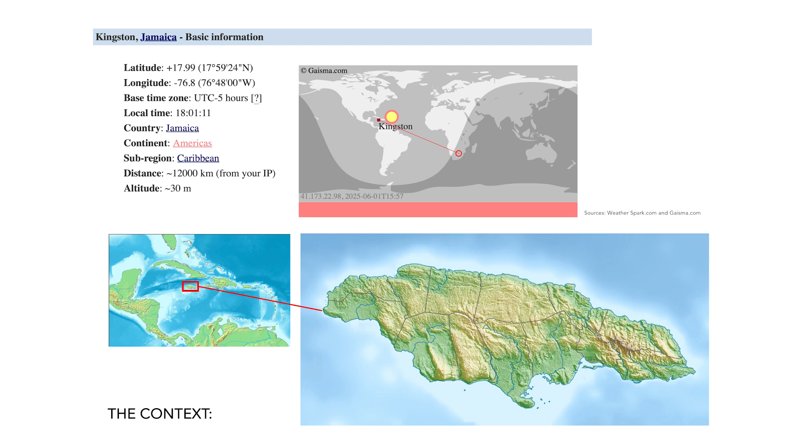I'm from Jamaica, a small tropical island in the Caribbean Sea, approximately 12,000 kilometers northwest of Johannesburg, around halfway between North and South America, and just east of Mexico. It's the 3rd largest island in the Antilles, Cuba and Hispaniola being the other two. Jamaica has a little less than 3 million people, which I gather is around half the population of the city alone. The island is mountainous, with a central ridge going up to around 2,256 meters above sea level, with the Blue Mountains in the eastern end.

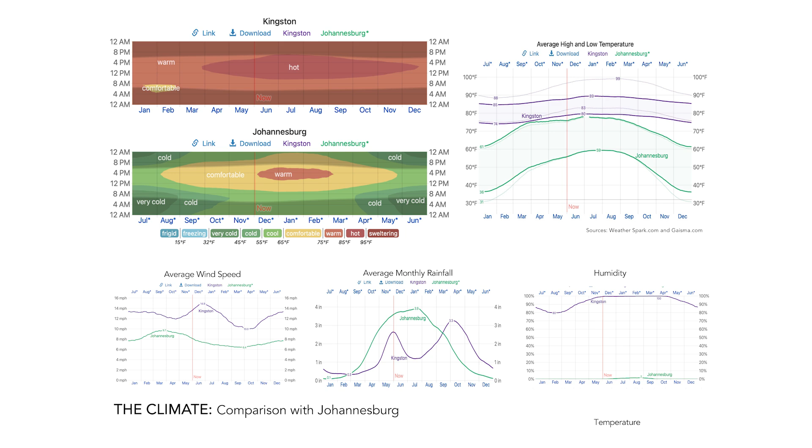The weather is generally hot, averaging between 26 and a low of 21 in the cooler months, which are November to March, and 33 degrees in the summer. So when you compare Jamaica with Johannesburg, our coolest time of year is equivalent to your hottest time of year. That's right. And that's why I'm so cold today.

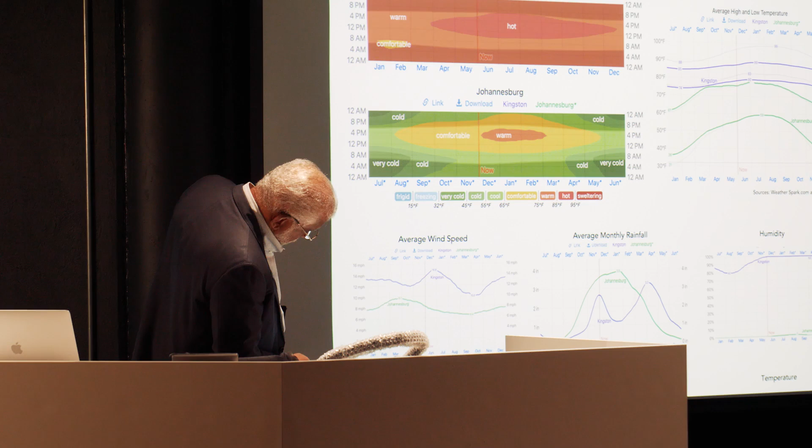Another sharp climatic contrast is the humidity, shown in this bottom right diagram, which ranges from 80 to 100% in Jamaica compared to nearly 0 in Johannesburg. The island is also susceptible to hurricanes, usually between June and November.

And also to earthquakes, the most famous being in 1692, which destroyed Port Royal, which was then called the wickedest city in the world, with pirates, plundering, and prostitutes. And in 1907, which destroyed Kingston, the capital.

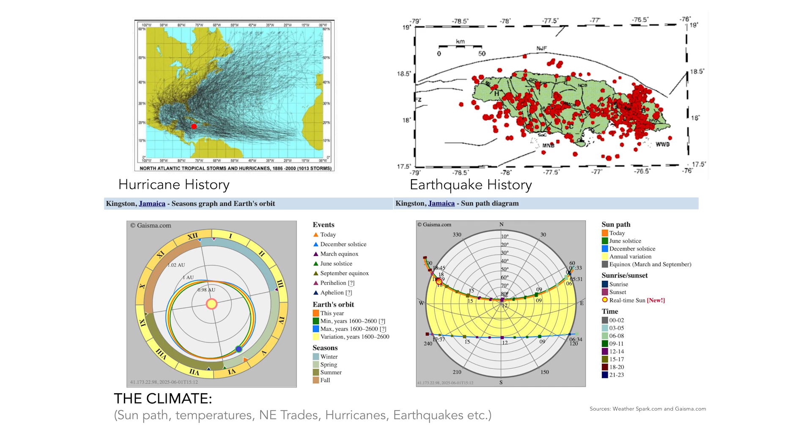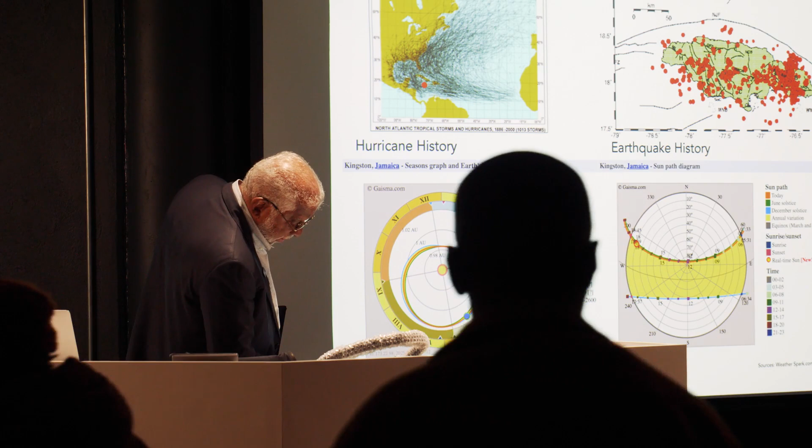While our motto is 'out of many, one people,' the vast majority of the population is of African descent, with 15% Afro-European, 3.5% Indian and Indo-African, 3% Caucasian, 1.2% Chinese, and other mixtures. Wow.

Jamaica, like many other Caribbean islands, suffered under slavery for almost 350 years, but never gave up the fight, with runaway slaves like the Maroons defeating the English.

One may ask, what is Jamaica's culture known for? One could argue rum, reggae, Bob Marley, and dancehall, Vybz Kartel. Its cuisine: ackee and saltfish, jerk pork, curry goat, and patty. Its cricket, Chris Gayle, and its track, Usain Bolt.

So it is in this context, climate, and culture that I grew up and still live. I was fortunate to have middle-class parents: my father, a civil servant who worked in Trinidad for the evolving West Indian Federation in the early 50s, and later as a statistician in independent Jamaica; and my mother, a World War II veteran ATS radar operator, who later became the first woman to sit on the bench in Jamaica.

The newspapers at the time reported that people would visit the Sutton Street Court in downtown Kingston just to see this novelty.

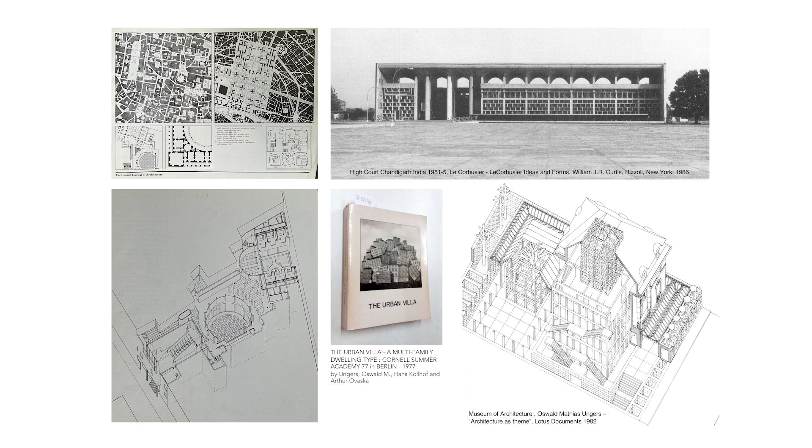Both these men, indirectly and directly, influenced my time at Cornell. Rowe with a humanist reinterpretation of the modern movement, with Le Corbusier as the major translator, while rejecting Corbusier's urban planning for the contextual idea of urban bricolage, exemplified in his book Collage City, and Ungers from the summer school in Berlin in 1977 that I attended, which produced the book The Urban Villa, Multifamily Dwelling Type, with his typologies, architecture as theme, and grids.

He assembled very famous architects at the time to come to Berlin. This was before the wall had fallen, for 3 lectures every week for 2 months, 1 American, 1 German, and 1 European. People like Kenneth Frampton, Bob Stern, Raimund Abraham, Richard Meier, Charles Moore, Peter Eisenman, Philip Johnson,

Rem Koolhaas, Aldo Rossi, Vittorio Gregotti, Alison and Peter Smithson, Hans Hollein, Robert Krier, Carlo Aymonino, Massimo Scolari, James Stirling, and Berliners, Jürgen Sawade, Georg Heinrichs, Josef Kleihues, Werner Düttmann, Rolf and Jan Rave, Volker Thyssen, and Johannes Uhl, who had an impression on me because he based his entire architecture on Charlie Parker's music.

The lecture series was open to the public and served as a platform for the exchange of ideas between students, architects, and different countries and the Berlin public.

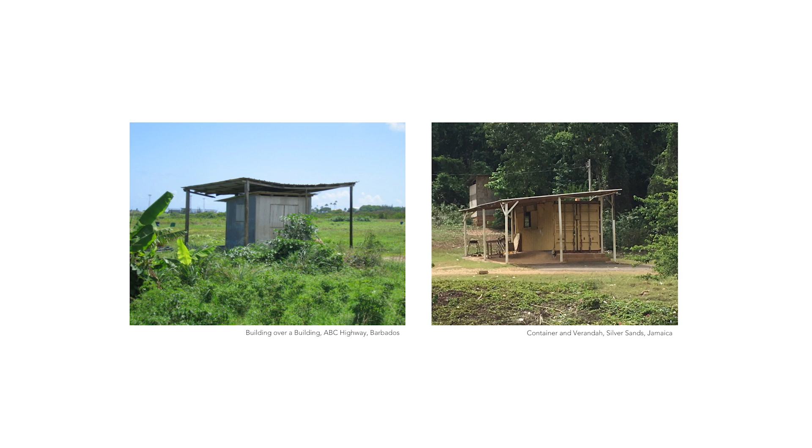So, the first residence designed over 40 years ago in Barbados. It was the first home for a young professional couple with a tight budget who wanted to break with tradition and engage an architect to maximize the 1,800 square feet that they could afford, in order to give the appearance of a much larger and more spacious house.

Nicknamed the Umbrella House, the design parti was to separate the roof and its supporting columns from the rest of the building and construct these elements in the early months of the year when it was dry, so the roof canopy could provide shelter and shade from the elements to ensure that work to the other areas could proceed uninterrupted during the rainy season.

Functionally, the house is divided into 3 simple hip-roofed pods, or umbrellas, creating a private bedroom zone, a private living dining room zone, and a carport storage vehicular zone added later.

The central entry and foyer acted as a divider space to separate the public zone from the private zone and to provide the initial view of the central garden with surrounding landscape, incorporating both inside and immediately outside the house.

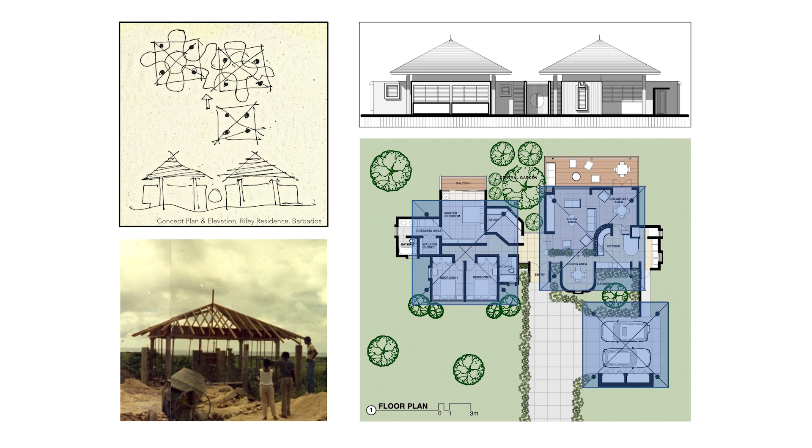The 3 sets of 4 circular columns support each of the 3 pyramids that are closed by a pine ceiling that conceals the main beams.

The enclosure walls are separated from this umbrella by a high-level ribbon window, forming a layer of transparency. These walls, sometimes curved, sometimes rectilinear, and sometimes chamfered, dart inside and outside and in between the columns. This separation between wall and roof virtually extends the boundaries of the house and brings in a lot of natural light, adding to the calm, floating feeling as clouds move slowly by.

The glazed mahogany front doors and curved natural coral stone were all built locally, while due to cost constraints, the other materials purchased were the least cost available off-the-shelf items based on standard sizes. A number of rooms were added a few years ago, but these additions have not affected the initial concept, and the front facade remains as pure and simple as it was three decades ago.

The next residence is a small single-story house for a unique pioneering individual who wasn't afraid to be the first to construct a building described as a strong yet sympathetic statement on a small site of a hillside cliff, long before electricity had reached the area.

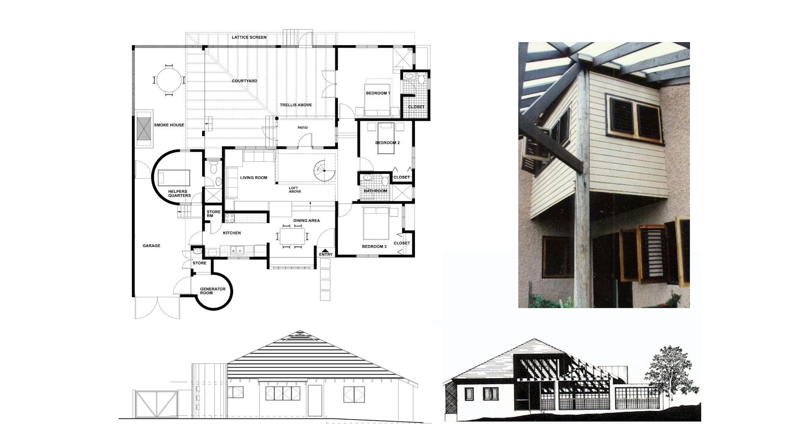The third house I'm going to show is what I say: interesting clients make interesting buildings. I recently had the pleasure of working with two sisters, Carolyn and Donette Cooper, longtime family friends.

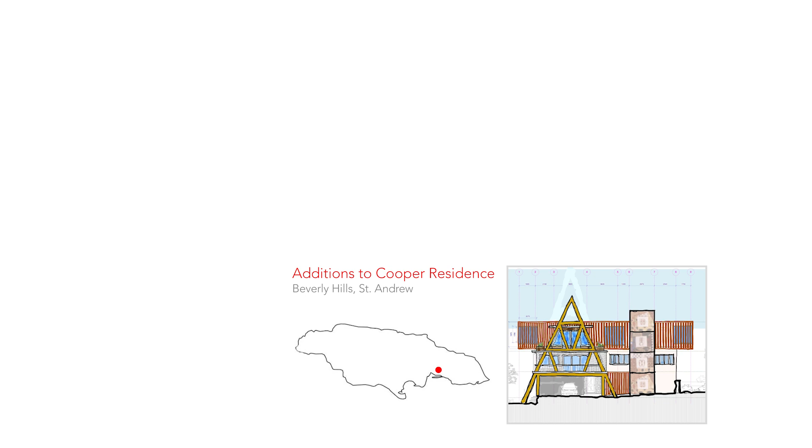Carolyn is a former professor of literary and cultural studies at the University of the West Indies and the author of brash but important literary works such as Noises in the Blood: Orality, Gender, and the Vulgar Body of Jamaican Popular Culture; Bob Marley: The Man and His Music; and Sound Clash: Jamaican Dancehall Culture.

Donette is a Washington, D.C.-based attorney at law, a textile and fiber artist, and quilter who has exhibited extensively over the last 25 years with permanent works in the National Museum of African American History. Her work is influenced by African textiles and the individual cultural and spiritual messages that they encode.

The brief, in a nutshell, was to modify Carolyn's existing two-story house and create a two-bedroom addition with a quilt studio for Donette, as she planned to return to Jamaica after retirement. Both sisters are Afrocentric, proud of their heritage and culture, and make no reservations in challenging colonial norms, even in the staid, upper-class Beverly Hills community on Long Mountain, where the residence is located.

Three site locations were looked at, either side of the existing house and on top of it. The site slopes from north-east to south-west, with upper-level views overlooking the city of Kingston. The existing 1950s concrete house is oriented to the southeast to capture the onshore breezes, while internally the living room and veranda have views of New Kingston.

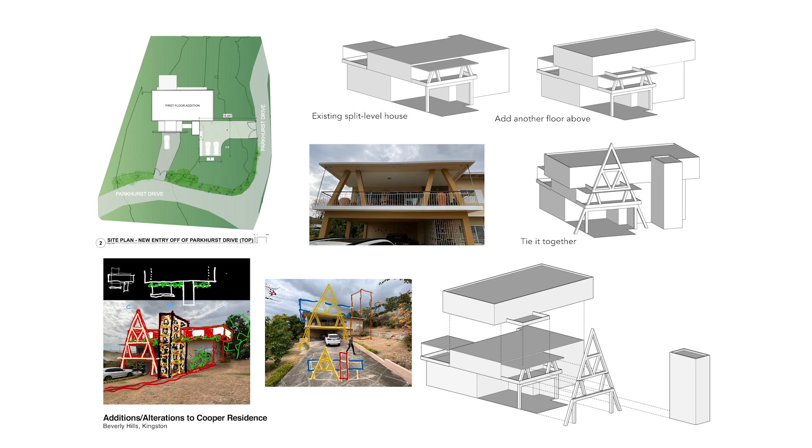The architectural concept was based on adding a third floor with openings at the corners to capture the views and breezes, while the structural concept was derived from the existing triangular columns.

These were extended to create an A-frame to support the upper floor and provide a strong vertical facade for the entry to the existing house. Together with a second vertical element and entry stairs to the flat, they tie the three-story composition together.

The upper floor is divided into two: the public living/studio zone and the private sleeping and service zone. All major spaces—living, studio, and bedrooms—are located on the corners to provide cross-ventilation and capture the views of the city to the southwest and the Blue Mountains to the northeast.

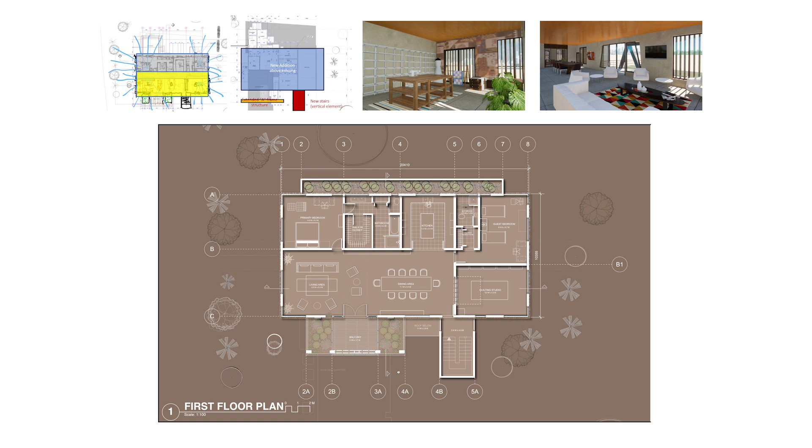Vertical wood slats wrap around the entire box, acting as sunshades during sunny and windy periods and as shutters during hurricanes. The overall composition reflects the spirit and unabashed cultural outlook of the clients and seamlessly integrates modern tropical elements while providing two separate dwelling places in one location.

The next project is the Basic Medical Sciences building, now the Faculty of Medical Sciences at the University of the West Indies, Mona campus. To quote from the National Renewable Energy Laboratory's 'Laboratories for the 21st Century': as a building type, the laboratory demands our attention. What the cathedral was in the 14th century, the train station was in the 19th century, and the office building was in the 20th century, the laboratory is to the 21st century.

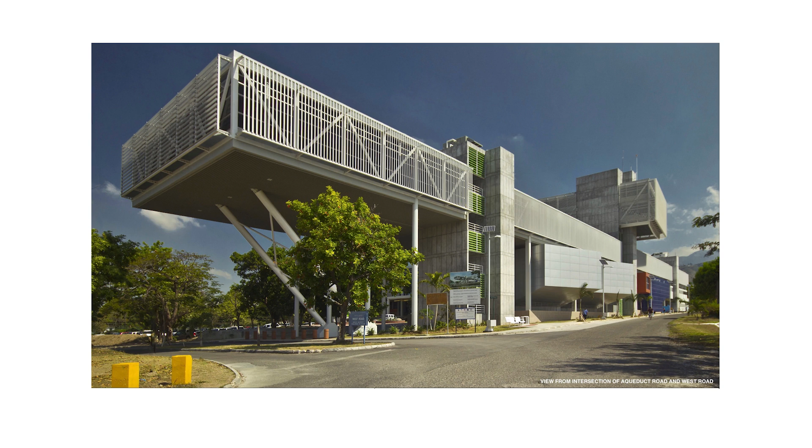That is, it is the building type that embodies in both program and technology the spirit and culture of our age and attracts some of the greatest intellectual and economic resources of our society.

As buildings are responsible for 40% of the world's total primary energy consumption, the architect, engineering consultants, and university felt that this complex should play a role in leading the way to making it more of a green building.

The building has a number of features that conform to good environmental practices and energy efficiency, such as using chilled beam air conditioning—the first time it was used in Jamaica—that utilized cooling from the nearby cogeneration plant, direct digital control, energy and building management system, solar lighting and heating and partial power, green roofs that replace the landscaped area taken up by the building, rainwater harvesting, grey water flushing, green fume hoods (another first in Jamaica), on-site water storage and disposal, grasscrete parking pavers, among other features, while making practical use of passive design strategies such as natural light, natural cooling concepts such as cross-ventilation, and also responding to site-specific conditions and natural environs.

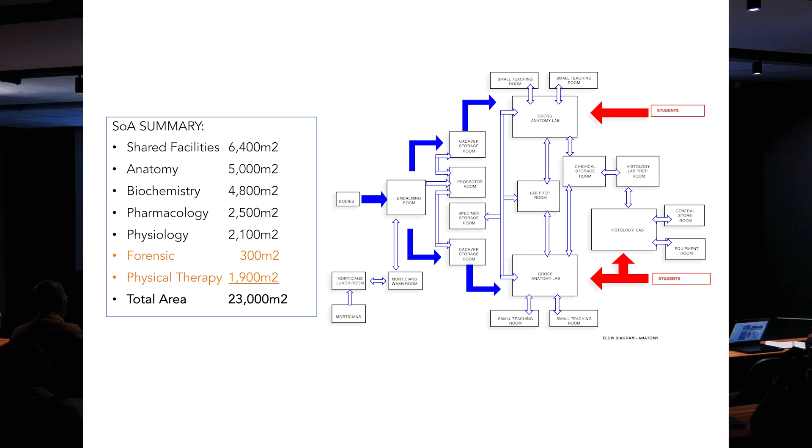Today, however, I don't want to dwell on this, but rather focus on the low-tech passive design factors relevant to the topic, namely the client, the context, the climate, and the culture, and the symbiotic relationship between them and the resultant architecture.

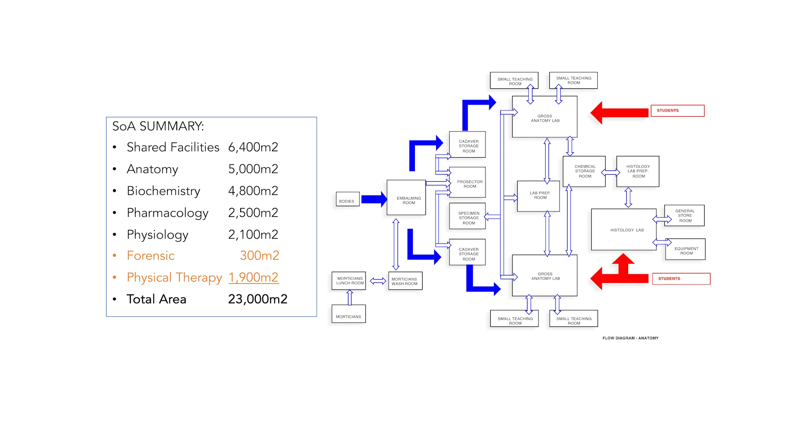The university capped the building height at 6 stories, which translated into 80% coverage of a relatively small site. The original brief was for a new state-of-the-art facility to meet accreditation requirements, with specialized programs developed by various department heads.

At first, each head of department wanted his or her own building. But after several meetings, detailed accommodation schedules, and discussions, the stakeholders agreed to do this vertically.

Two climatic factors influence the design most: sun, the light and heat, and wind, the cooling breezes and hurricanes. Maximizing the abundance of natural light and the reduction in the amount of artificial light was a major factor in

the extensive use of glazed areas to the offices, research areas, and laboratories. Our tropical climate, specifically the site's coordinates, as well as functional necessities such as work surface heights and counters, determine the extent of glazing. To reduce the heat buildup on the external surfaces, sunscreens and other shading devices were necessary to ensure that most glazed areas were protected.

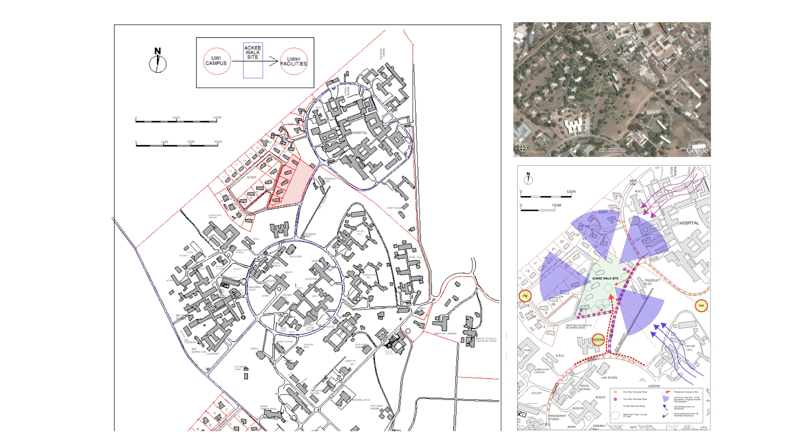These facilities include large lecture theaters, tutorial and seminar rooms, lounges and reading rooms, and network areas. The massing of the shared facilities on the eastern boundaries was distributed as pods with ventilation pockets between them to allow the easterly breezes to flow through the complex.

The sunscreens were engineered to protect the glass behind from flying debris, the main cause of damage during hurricanes, and the glazing to wide expanses were laminated.

The existing north-south link between the university campus to the medical campus emphasized the overall axis of the site and movement of students on foot. Countering this was a natural inclination to design an east-west oriented building to minimize the eastern and western exposures.

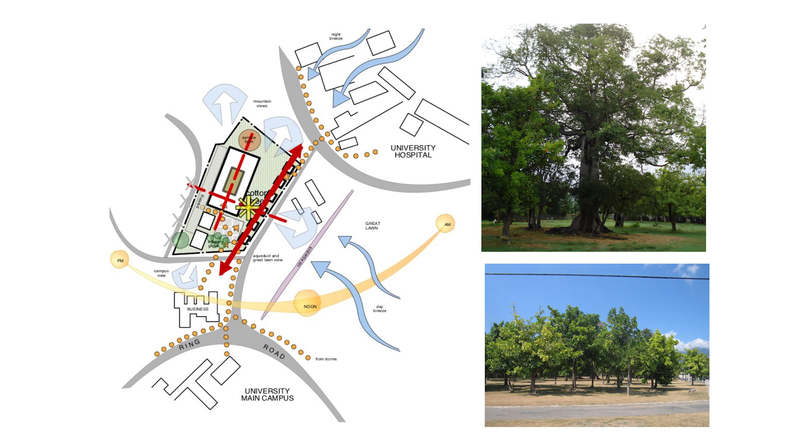However, the eastern view of the nearby old aqueduct, the Great Lawn and mountains is spectacular, with the morning sun rising quickly. The advantages, therefore, greatly outweighed the slight disadvantage that was overcome with protection by selective shading.

The lower section of the site was called Ackee Walk because of the Ackee trees in the south, where the cluster forms a rich canopy near to West Road.

Culturally, the planting of Ackee trees is associated with slave graves, and indeed a number of these remains, while not found on the immediate site, were discovered next door during excavation for the drainage pipe in the road just west of the site. The Ackee Grove is therefore a distinctive feature and good starting point to lead visitors into the

site. In the design, the existing node is reinforced by the creation of a fairly low semicircular amphitheater for small gatherings. It slopes from the west road towards the central areas of the site. The Ackee is also Jamaica's national dish and enshrined in our folk songs.

Another cultural element is the cotton tree. In Jamaica, the cotton tree is associated with ghosts, or what we call duppies. And as noted Jamaican cultural icon Olive Senior has noted, the tree is widely regarded as an object of both superstition and awe, and it is generally felt that a cotton tree should not be cut down, or else something bad will happen to you. Well, I didn't want anything to happen to us.

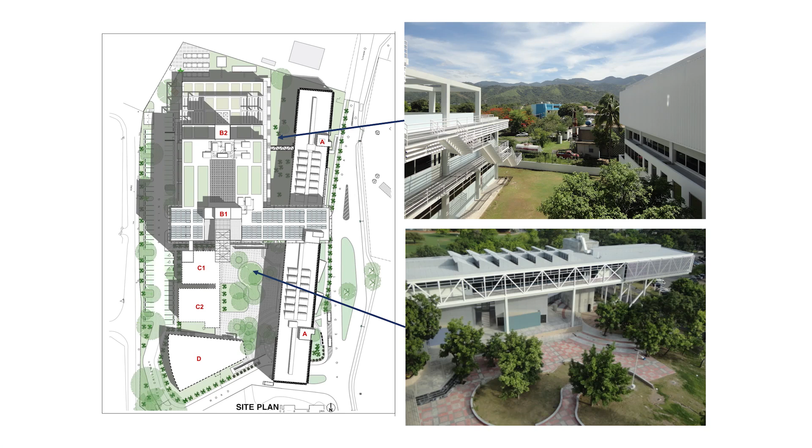Meeting the functional requirements, understanding the existing climatic and contextual influences, and a sympathetic approach to cultural norms led to a strong inside-outside relationship between the natural and the built environment, keeping the existing cotton and Ackee trees while creating functional and pleasant spaces for students and tutors to learn and relax.

The complex is roughly divided into four: a linear block, a central east-west block, and a northern section, and two southwest blocks to be constructed in phase 2. That would be C and D.

These blocks form two major open-to-sky spaces: a linear lawn to the north, and a central plaza to the south that leads from the Ackee Grove to the entrance.

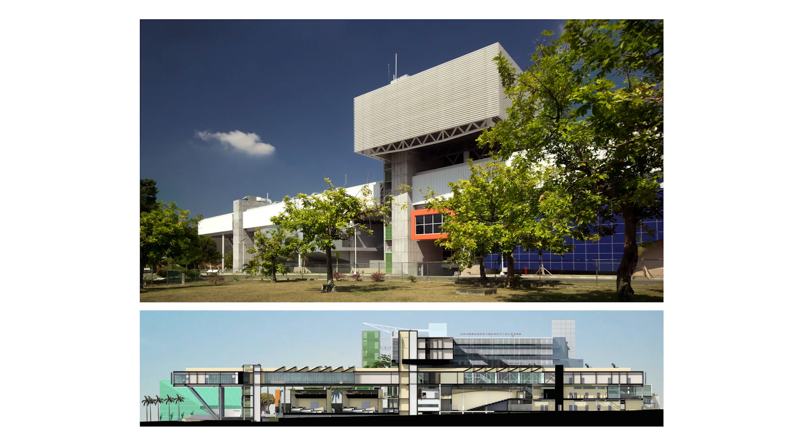Block A is extremely long, 160 meters, a three-story building consisting of 5 individual two-story object-type buildings housing shared facilities that are capped by a truss or protective canopy, with laboratories and research offices at the top level.

As the two main elevations of the canopy face east and west, all glazed areas are protected with vertical sunscreens that are more closely spaced on the western elevation.

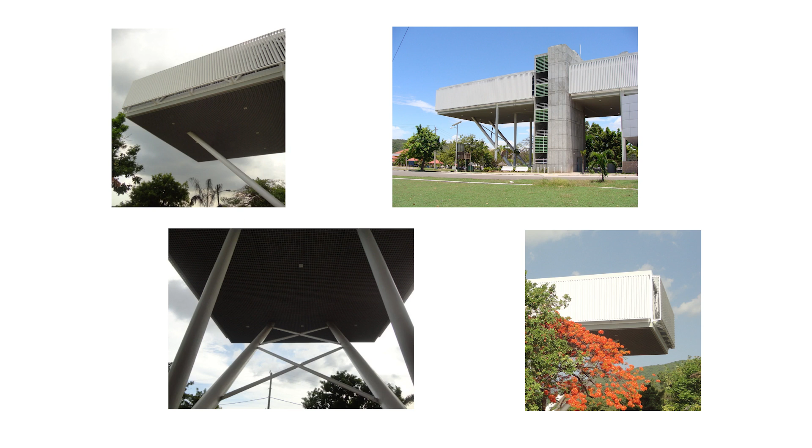The canopy is supported by columns at 8 meters with X-brace trusses, and it ends in the south with a dramatic cantilever over the main entry at the intersection of the west and aqueduct roads at the southern end of the site.

The main pedestrian entry is under the canopy and through the Ackee Grove up to the amphitheater steps and into the Agora, or central meeting plaza.

Block B ties the eastern and northern sections of the complex, with the cotton tree acting as a pivot or joint to Block A. This is it, and you can see the cotton tree.

The cotton tree at the central area where blocks A and B meet. The main pedestrian entries under the canopy and through the Ackee Grove.

Block B is the tallest section of the complex and is accessed both from the basement parking level as well as from the main entrance off of the plaza. Its form is ideal from a passive solar design standpoint, being fairly narrow and long with small surface areas facing east and west.

Inside Block B, there are 2 atria. One is a 6-story space that links the main labs, and the smaller one, a 3-story space. Both act as light wells and bring natural light to the lowest levels of the building through a space frame and skylights, and this area is not air conditioned.

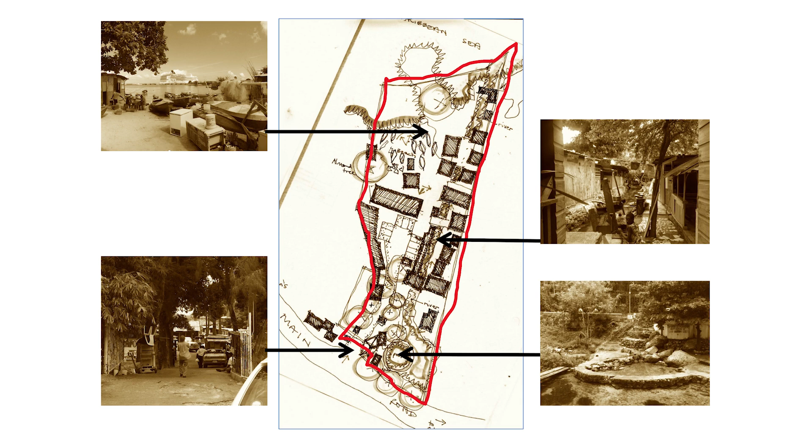The next project is in St. Ann, which is on the north coast of the island. And my first impression of the location, the site and the context was total chaos. The driveway was choked with cars and huts.

The Sailor's Hole was in bad shape and barely accessible, while the river was used as a service back-of-house area, washing and emptying trash, and the beach was overcrowded and hardly visible. The place had a reputation for drugs and harassment of visitors, if you could only actually get in.

However, with the problems, we saw potentials, and there were 4 elements that stood out: 1, the existing trees; 2, the pool or sailor's hole; 3, the river; and 4, the beach. And the uniqueness of the site, as well as the beautiful carvings in the trees.

So this shows the entrance and some of the carvings in the trees.

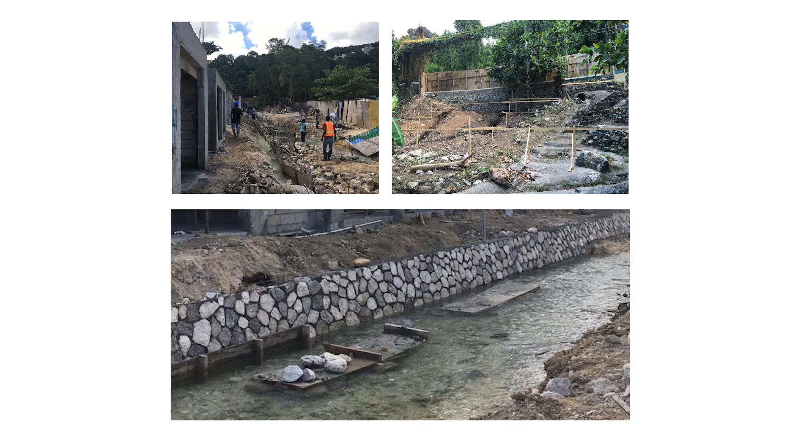And many of them were also engaged as subcontractors to the main contractor and worked on the excavation, the diversion of the river, and the cut stone wall, even adding their own flair and color of choice and spacing of the stones, which wasn't what we had designed originally.

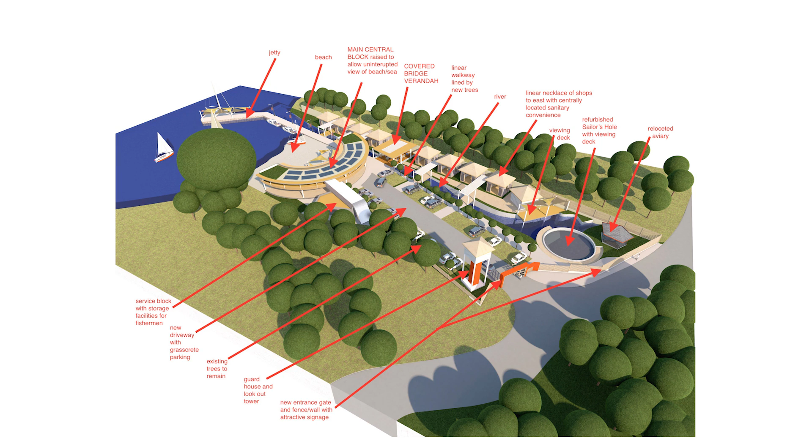The architectural concept emerged from a melting pot of the relevant brief, in a broader sense, the client, the climate, protection from the sun, wind, and rain, while capturing the northeast breezes, the context, in particular the axial grove of tall entry trees, the pool, the river, the beach, and the sea, and the culture, the fishermen's daily marine rituals, the colorful boats, and the art and craft of the work and music that was there.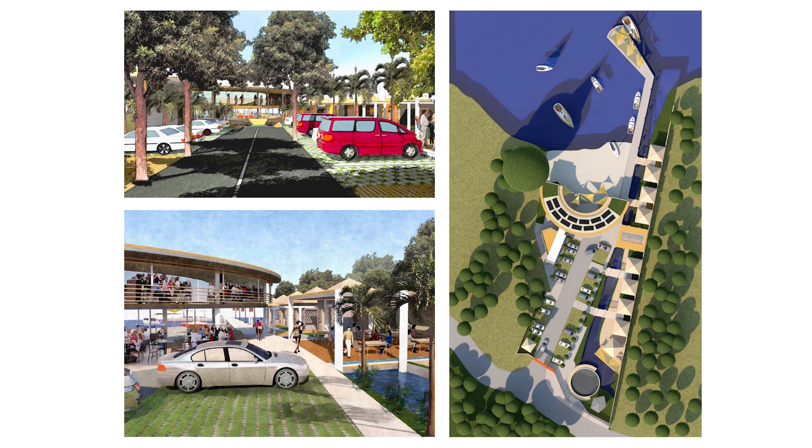So firstly, we created a wider, more accessible entry. We insisted that all the trees be kept, even although trimmed initially, even if we had to twist the road, which we had to do a little bit, or to lose 1 or 2 parking spaces, as they formed an axial grove on either side of the driveway.

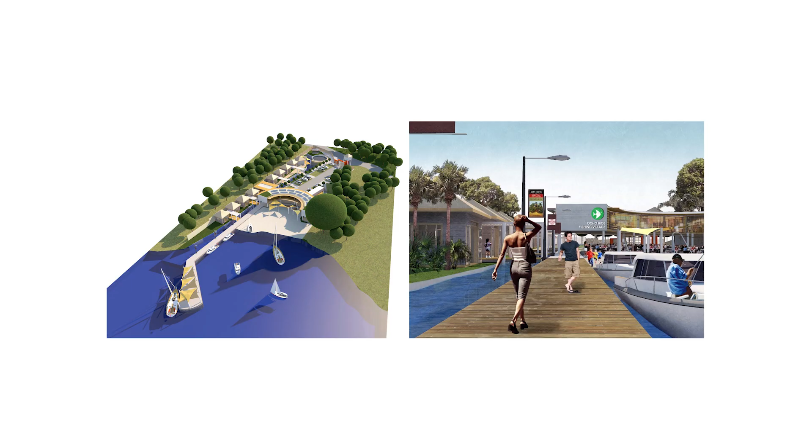Then we proposed a main central restaurant block to provide a constant visual connection between the entrance, the beach, and the sea. From where you arrived, we enlarged the pool and made some adjustments to the river to bring it to prominence in front rather than behind, so that all the shops opened onto a new deck east of the river. And finally, we opened up the expanse of the beach so that it can now accommodate both the fishing boats and a new sand amphitheater area for mixed activities.

Overall, the idea and design intent was to create a strong relationship with the beach and the water generally, as both the sea and the river are now always visible from the entry and all public areas.

The existing residents were then given first refusal on the shops, and based on their income, we started with a 5.4 square base model that could be quartered, halved, or doubled, both horizontally and vertically, giving at least 5 or 6 option sizes, depending on the area requirements and what could be afforded, while maintaining an overall uniform look.

The envelope is very resilient and becomes a bunker during natural wind hazards. It is wrapped with light wood strips to add further insulation to the walls. The lightweight white roof, supported by slender steel columns, like a building over a building, reflects the sun's intense heat and provides shade to the area immediately in front of the shops.

The curved restaurant frames a mini amphitheater with sand stage and has 4 uses. The upper floor houses 2 restaurants with commercial kitchens, while the ground floor has an undercroft to the east with shared dining and multipurpose covered open space with fully accessible public washrooms. To the west is the fisherman's service area, cold room, lockers, changing room, showers, etc.

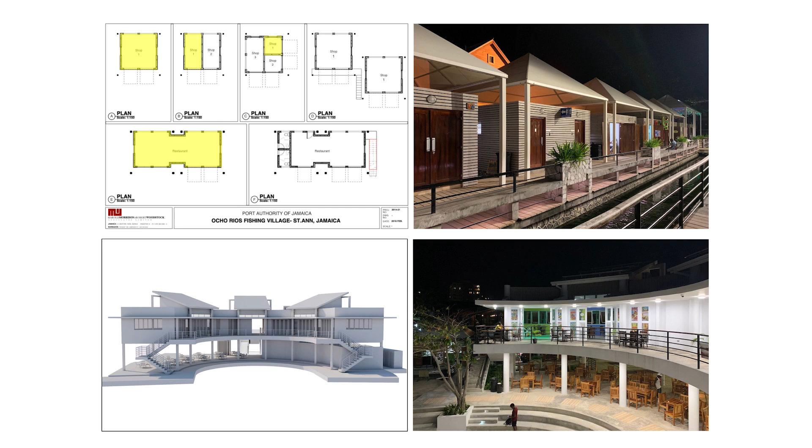So to summarize the design intent: the existing trees were kept, in particular those lining the existing entryway. The main large restaurants were raised on pilotis and centrally located to allow visual access to the beach, with all dining areas taking advantage of the excellent views. There's a clear separation of vehicular and pedestrian traffic, reinforced by strong landscape elements with regularly spaced trees running parallel to the main walkway and boardwalk.

The sailor's hole or plunge pool was further developed, while the river was cleaned to become the important central feature which runs through the site. All shops were located on the east with a strong relationship with the river and the main walkway or boardwalk that culminates by the sea. The beach was cleared and increased and enhanced.

The beach becomes a central party area at night, framed by the curve of the restaurants and dining areas. The services, including solar for heating and lighting, and the storage facilities for the fishermen, were discreetly located to the west.

And these are the owners of the shops, which had various sizes.

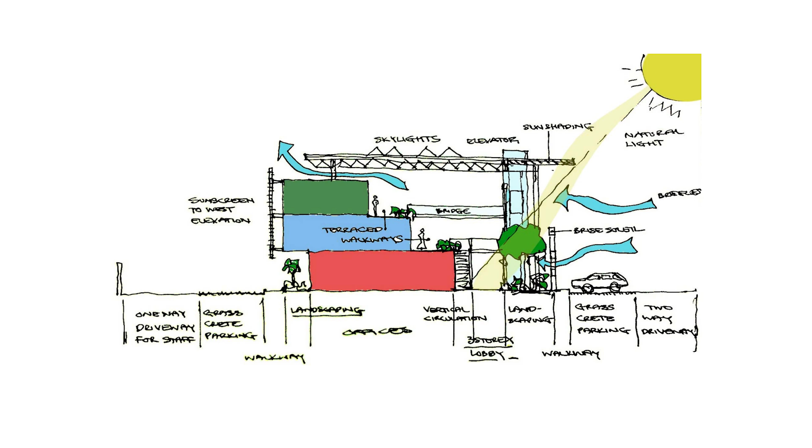So unlike the typical medical center, it aimed at being different. The facilities had a connection to the staff. Patients wanted to be noticed upon arrival and not overlooked, conducive to well-being. Patients wanted creature comforts to keep them from being bored or anxious. It was easily accessible, so they wanted to be able to get in and out of the clinic as fast as possible, with ease of wayfinding.

It was confidential and private. There were outside areas but inside closed areas, so you'd move from space to space. So even though the waiting time may have remained the same, because you're moving from area to area, it didn't appear as such. It also accommodated caring for the family.

In Jamaica, in particular, medical facilities deal with the patient only, whereas we were able to convince them that it would be better for the person seeking treatment to be allowed to bring family with them. There was additional seating and signage that accommodates the elderly and those with various impairments, and of course, being close to nature, where patients highly value views of gardens, sky, natural light, as well as contact with nature.

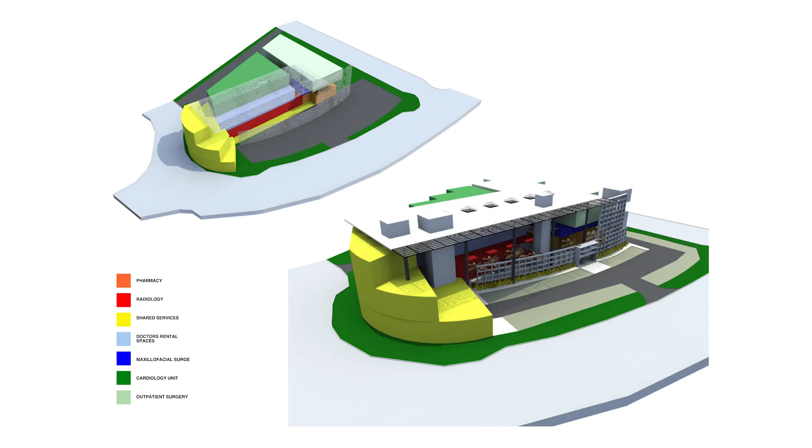This shows, based on the site, it was a very funny shaped site. They had 2 main roads, one was Port Avenue and the other Crane Boulevard. And then we created a road in between, which also faced west, which in Jamaica is the worst face.

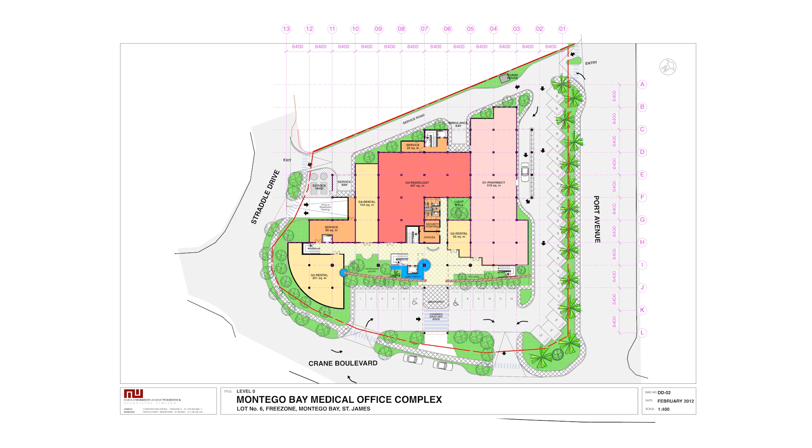So we had most of the services and service access from that side, whereas the east, the brise soleil shielded the eastern areas from the sun in the morning, and there was a pool area and garden, off of which you then enter the various facilities.

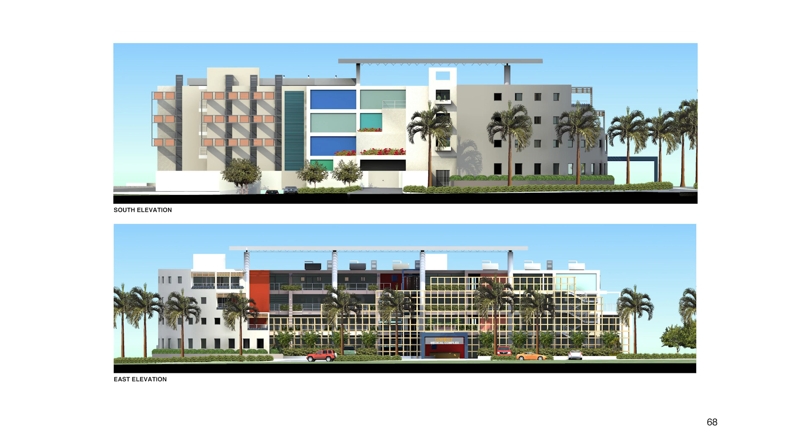And this is a completed building.

And the last one I think I'll show is, because it's a campus, this is a new IT building at Harrison College. And this was really a challenge for us because if anybody knows about Barbados, Harrison College is the oldest high school there, from the early 1700s. And getting a building approved by the board was very difficult, particularly a building like what we were trying to do.

So we had to make a presentation to the board, and we did our research and made a number of quotations. One was that the campus is a physical manifestation of educational philosophy to which the school is committed, and that it is conveyed through educational experience. And the planning and creation of contemporary buildings signal the college's willingness to foster the best of innovative architecture, thus contributing to an expanse of knowledge and experience with the physical environment.

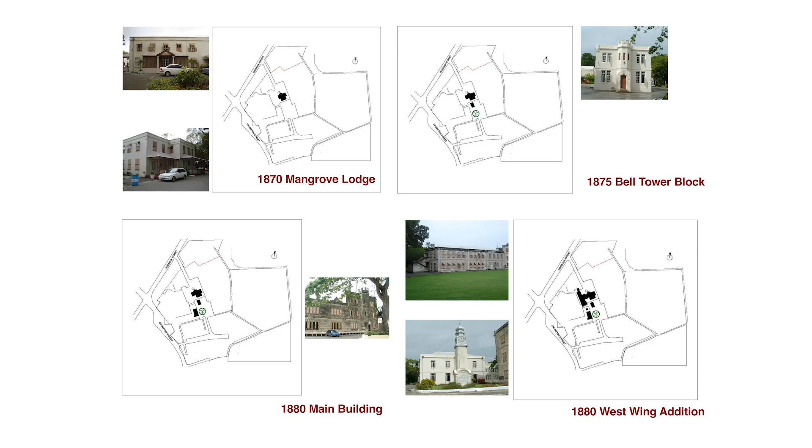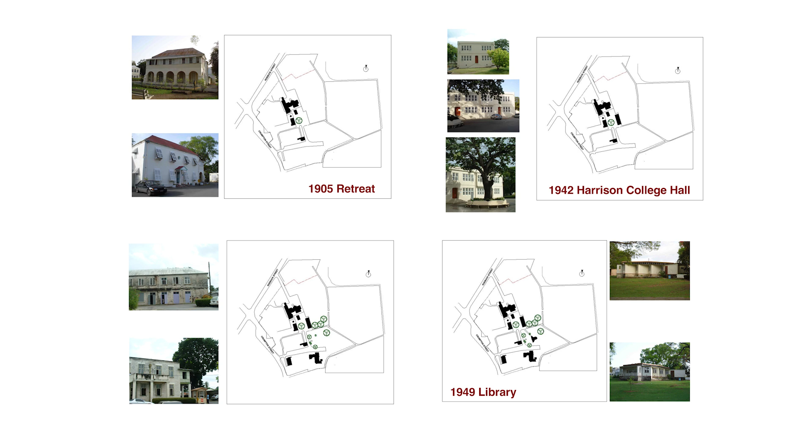And so we took them through the whole historical context of the building, going back to 1733 when the school was founded, and this sort of history and development of the schools and the various buildings on the campus.

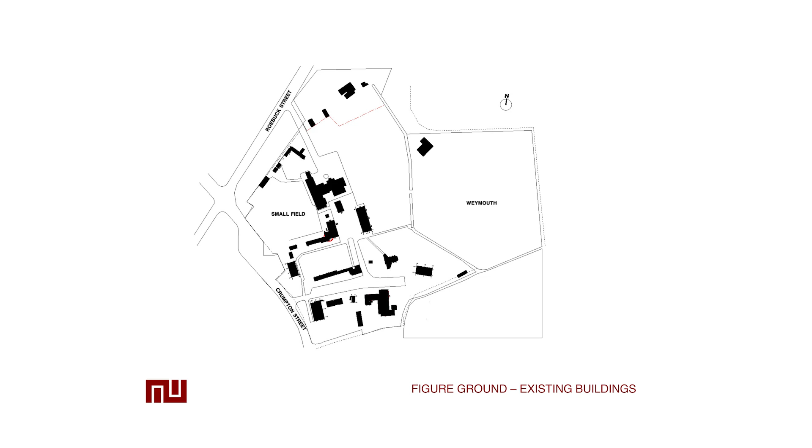So from an architectural perspective, it was important to look at the building and construction history of the school to see how the design structure and the campus evolved, and to analyze the layout and relationship of the buildings, to try to understand the important planning and architectural decisions that exist to ensure that our intervention continued existing themes and was consistent with the dominant characteristics of this design structure.

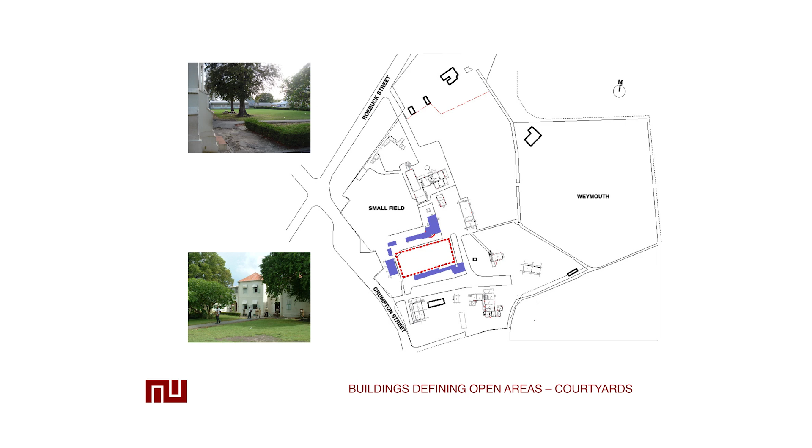And so we looked at various things: building orientation, focal points, defining open spaces, defining streets and corridors, framing views, looking at trees, terminating vistas, creating edges, a forest of trees, and so on.

And I'll give another quote from Freedom from Architectural Oppression. 'Architecture has the potential to promote the importance of self-discovery, innovation, and free thought, as well as respect for history, knowledge, and the natural world. The presence of open glass buildings in new spaces on campus would provide a liberated environment free of emotionally and intellectually stifling traditional structures. Any college campus should be constructed to provide an atmosphere of acceptance and openness to new ideas. It should be an environment where each student is free to express his or herself freely and independently.'

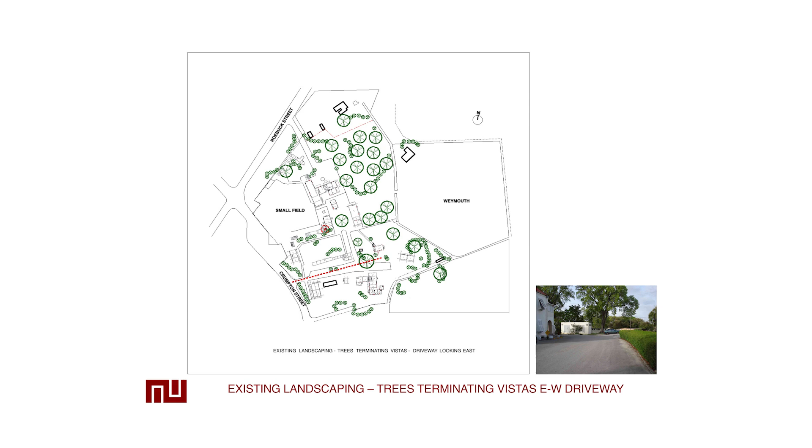And I think it was this quote that won over the board, because when I went in to make the presentation, everybody looked grumpy and sullen and ready to kick me out. And at the end of it, they all clapped.

So we proposed a building located between the main hall and the only other modern building on site, which was designed by one of Mark's former partners. This shows the different architectural elements.

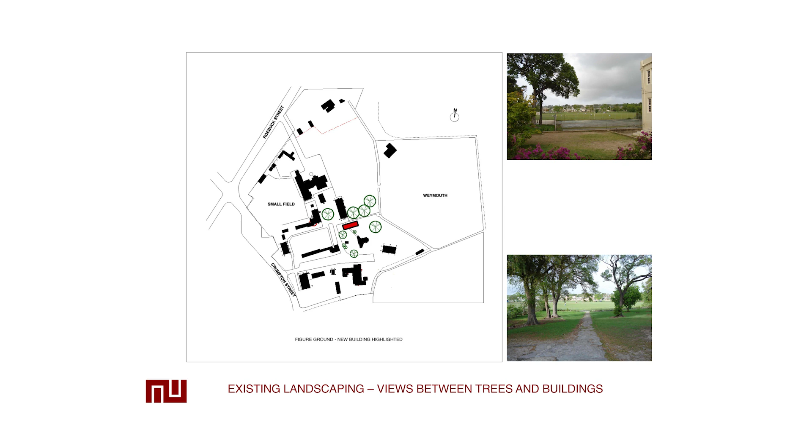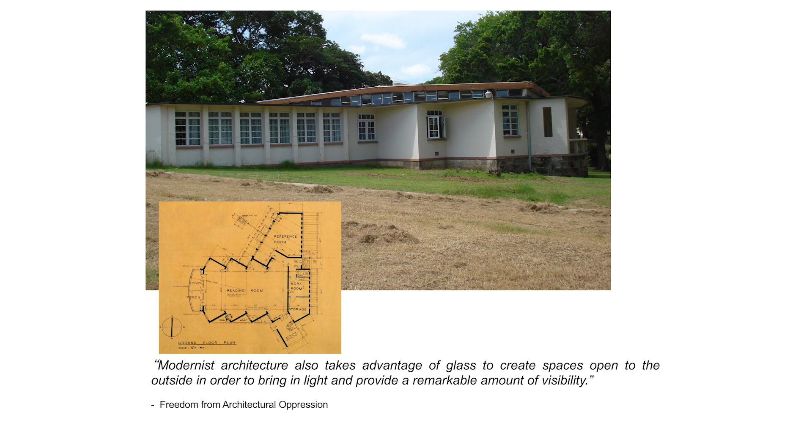You know that building? Yes, the library. So the building that we located was between the library, which was set back a little bit, and the hall.

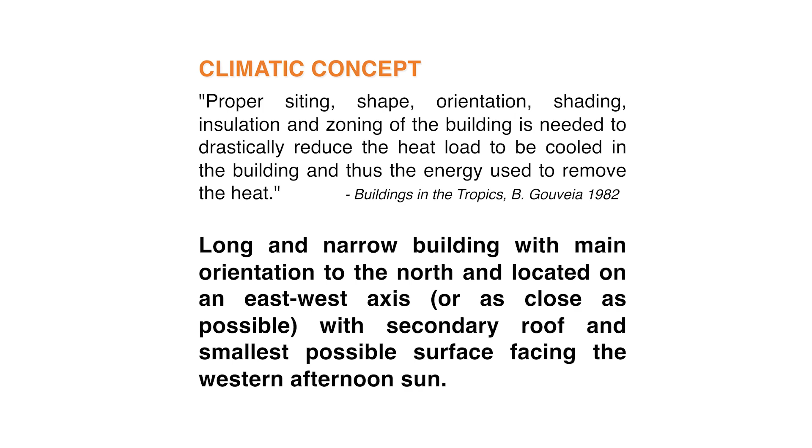So we ended up with a fairly long, thin, single room, wide building running more or less east-west on 2 stories.

And I ended by quoting this quote, after which they approved the building, and it was built within a year after that.